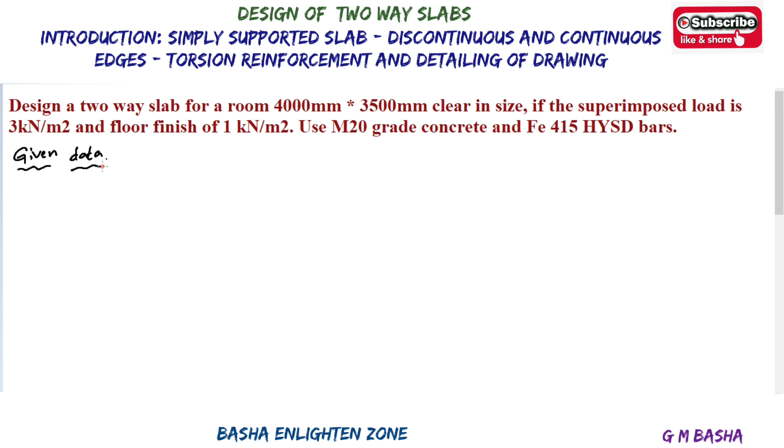First take down the given data. What is given in the question? Shorter span, Lx, will be equal to 3500, and Ly will be equal to 4000, in mm. Live load will be equal to 3 kN per meter square. Floor finish will be equal to 1 kN per meter square, FCK will be equal to 20 Newton per mm square, and Fy will be equal to 415 Newton per mm square.

In the one-way slab, by seeing the data itself, first you can confirm whether it comes under one-way slab or two-way slab, then go to the design. But in the two-way slab, there are various conditions we have to observe. First, each time we go with the ratio Ly by Lx. Whether it is less than or equal to 2 comes under two-way slab - that confirms it. If it is greater than 2, it comes under one-way slab.

So what is longer span direction, which is 4000 by 3500? If you see how much the ratio will be, it will be around 1.14, which is less than 2. Therefore the design comes under the two-way slab.

Sometimes in the question they will ask directly to design a slab. At that time you check the ratio first to see whether it comes under two-way or one-way slab. Here they gave shorter span direction as 3500 in x direction, and y direction as 4000. They didn't mention any conditions, because in this same problem I will explain different conditions - what are the different conditions in the two-way slab.

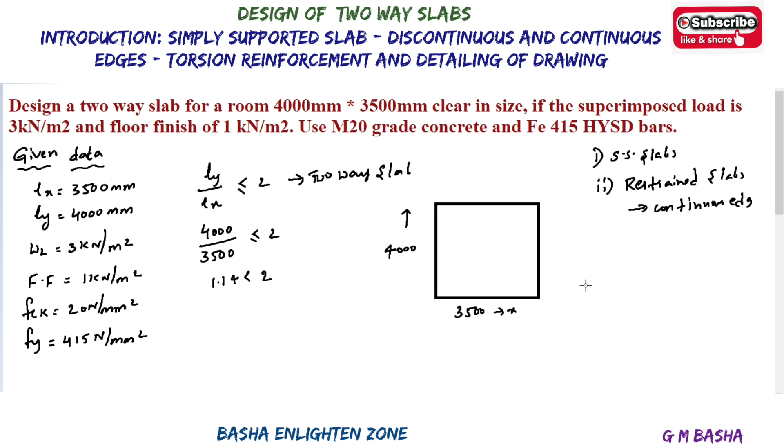For example, if you see this slab here, and again if I take one more slab here, we are going to design this particular slab with dimensions of some 4 by 3.5 meters. So here one edge will be continuous. Sometimes the condition will be different - two edges will be continuous, meaning these two adjacent edges will be continuous.

Sometimes opposite edges - this is the span what we are designing - the continuous edges will be on opposite sides, like this. Either in long span direction, long span edges continuous, or short span edges continuous. The span is continuous in different ways - that is another type of condition we have to take into account.

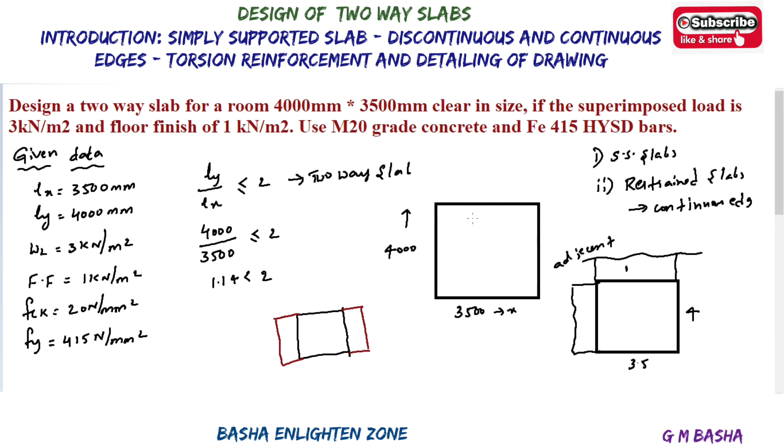First, we will go with this condition: the slab is discontinuous on all edges and it will be prevented from lifting. Another thing we have to clearly observe - this is the top view what we are seeing now. For example, if I take the same slab in 3D mode, this is the slab of some 3.5 meters by 4 meters.

The slab has rested on the columns like this. If you observe here, this is a simply supported slab and there will be no continuous edges, which is discontinuous on all sides.

At this time, you know the condition - this is one-way slab, meaning x direction is the shorter span direction and y is the longer span direction. In the one-way slab, it bends in the shorter span direction. Therefore we provide main reinforcement in shorter span direction and distribution reinforcement in longer span direction. This is the distribution reinforcement and this is the main reinforcement.

But coming to the two-way slab - it bends in both directions, either in y direction and in x direction. Therefore we have to provide main reinforcement in both the shorter span direction and longer span direction, since there is a chance of bending the span in both y direction and x direction. Therefore we provide reinforcement in both directions.

At the same time, if the slab is continuous like this - for example, see here, the slab is discontinuous on all edges.

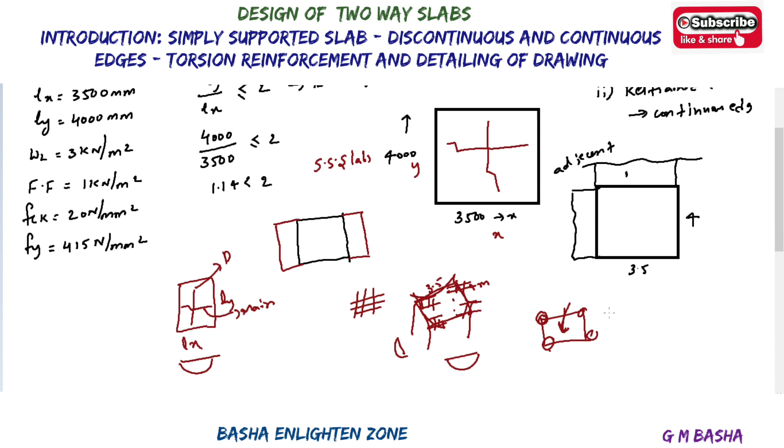And one more thing to observe: if the slab is continuous like this, the slab will be continuous on adjacent edges. So this is one edge, this is another edge. What happens here? This corner cannot lift up, because this slab is continuous. The reinforcement is also provided continuously from here to here in the slabs. Therefore, there is no chance of lifting up here.

Coming to this corner, this is a free corner with no continuous edges on both ends, so automatically this corner will lift up. That is the reason we have to provide torsion reinforcement at this corner. So for that, what is the percentage? We have to provide some 3/4 area of steel like that. I will explain in the calculation how you have to provide it.

Coming to these two edges, this edge and this edge: one edge will be continuous, another edge will be free. Therefore, we have to provide half of the reinforcement that we provide at the free corners, which is 1/2, meaning 3/8 area of steel. The same condition happens here, because up to some extent it will be prevented from the other edges, but the other edge is free. Therefore, we provide half of the reinforcement at these two corners. So we provide full reinforcement at the free corners, and here no reinforcement is required.

Now come to this condition: this slab will be continuous on opposite edges, both opposite edges. At these edges what happens? There will be half of the reinforcement at these corners, and at the same time, each corner has one discontinuous and one continuous edge - discontinuous, continuous, discontinuous, continuous. This means we have to provide just half of the reinforcement for all the corners of the slab, on all four sides.

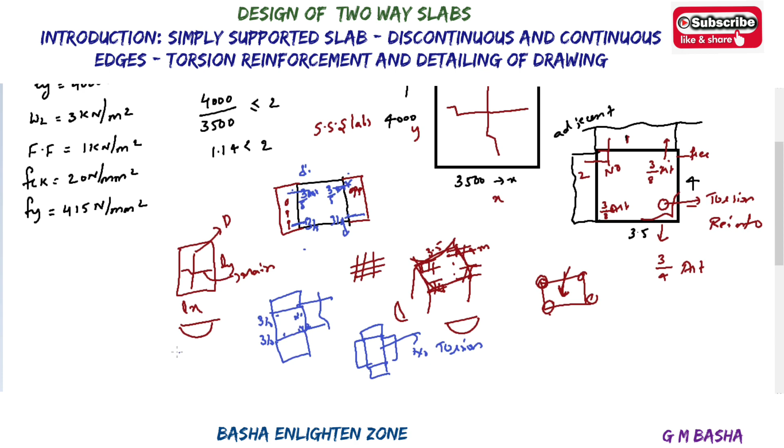So first, according to our question, there will be no such conditions - I am just solving the problem based on simply supported conditions. Again, I will show how to provide torsion reinforcement, and take the condition where the edges are continuous, to show in what way to solve the problem. In this one example itself, I will show the difference between the three examples.

Continuing this problem, our first step is always to check the L by D ratio, the span to depth ratio. This is based on the depth of the slab.

For that, you can refer to the code book, page number 39 in IS 456. Check that page number. There it states for slabs spanning in two directions, that is two-way slabs.

The shorter span of the two spans should be used for calculating the span to effective depth ratio. For two-way slabs of shorter span up to 3.5 meters, our LX will be 3.5 meters only, so we will suit this condition.

With mild steel reinforcement, the span to overall depth, meaning L by capital D, not small d, ratios given below may generally be assumed to satisfy vertical deflection limits for loading class up to 3 kN per meter square, so live load up to 3 kN per meter square.

For simply supported slabs, L by D ratio will be 35, and that is for mild steel, which we are using as Fe250. For HYSD bars, you take the factor multiplied by 0.8 for these values. For continuous slabs also it will be 0.8.

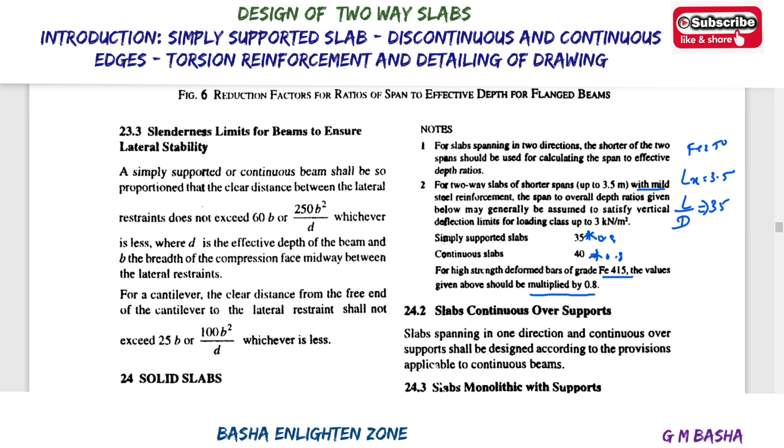So 35 into 0.8, how much will it be? If you cross check with your calculators, 35 into 0.8, how much you will get? You will get around 28, so L by D will be equal to 28.

So the depth ratio will be around L by D. This is how the L by D ratio we have to take in slabs. This is capital D here, I will take capital D only, and capital D will be around 28. So check with the depth, take down the L value in the shorter span direction.

This is 3500, so 3500 by 28, you will get around 125 in mm. So your overall depth will be 125 mm. I will take an approximation of capital D equal to some 150 mm.

So for this approximate value, small d I will choose effective cover around some 25 mm, so small d I will take 125 mm. Based on this condition, we get one conclusion: it should not be less than 125, so your capital D we cannot provide as 120 or less than that value.

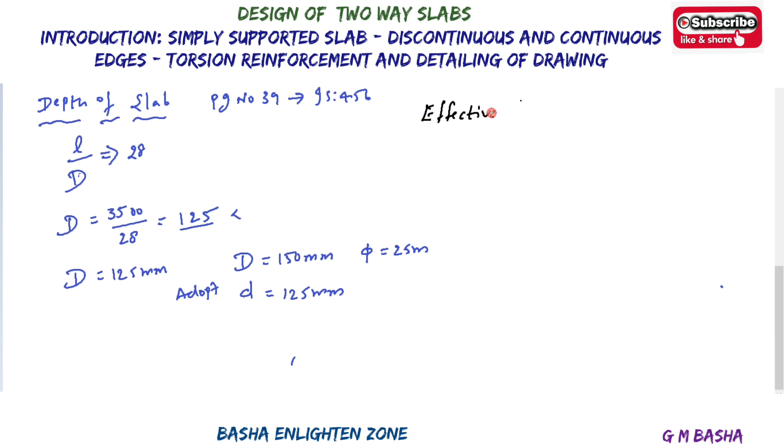Then our next step, after obtaining these values, is finding the effective span. So we know the condition for the effective span: clear span plus effective depth. I will take this in both x direction and y direction.

So LEX, which is in x direction: clear span will be 3500, effective depth will be 125, how much will you get? 3625 mm. And in y direction, 4000 plus 125, so approximately we will get 4125 mm.

So these are the ranges for the shorter span direction and longer span direction. Again check the ratio of LEY by LEX, so you will get 4.125 by 3.625, which is almost 1.14.

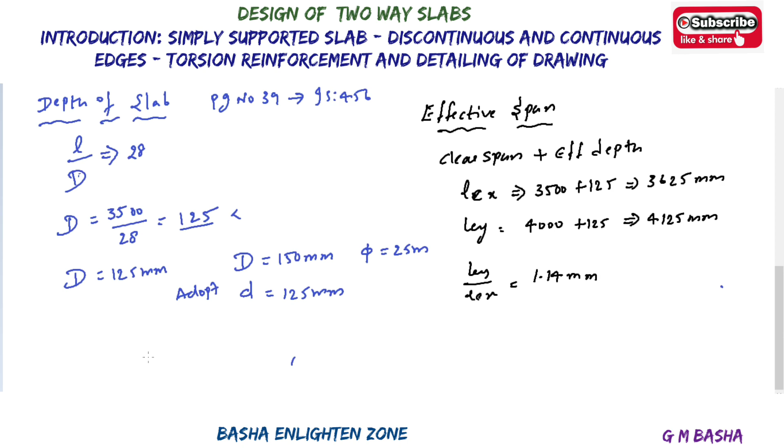Then you can go for the next step, which is slab loads. For slabs, we already know the slab portion, and the thickness we choose here: d will be equal to 125 mm, which is the depth of the slab we provided.

In the short span direction, lengthwise, lx will be around 3625 mm, and in the long span direction it will be around 4125 mm, both directions. So this is the slab and the depth of the slab.

So how will the loads be calculated? Self weight of slab will be equal to, generally for beams we take b into d into unit weight for unit meter. But for slabs, lengthwise it is 3.625, widthwise it is 4.125.

So what I am taking here: lengthwise I will take up to 1 meter, widthwise also I will take up to 1 meter, so totally it is in meter square. That is 1 into 1 into unit weight of RCC, which is 25 kilonewton per meter cube.

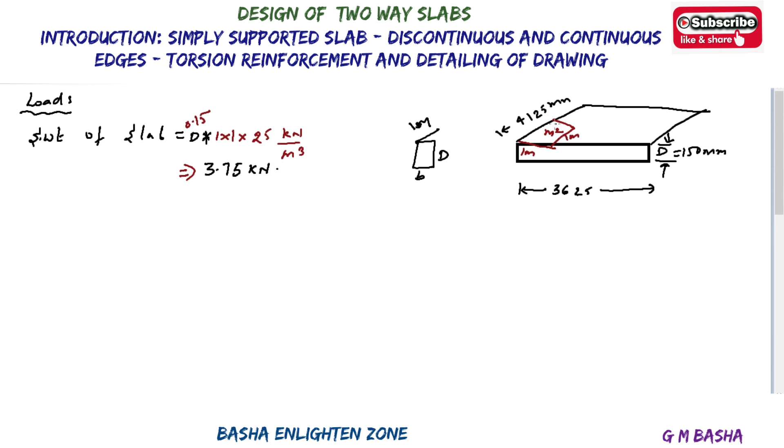And at the same time, each and every live load you observe in the question, they are given 3 kilonewton per meter square, like that. For beams it will be given 3 kilonewton per meter only, and again floor finish will be given 1 kilonewton per meter square, otherwise you can assume your own value. So then take down the total load, 3 plus 1 plus 3.75, which is 7.75 kilonewton per meter square.

Again take down the factor load, which is 1.5 times of 7.75, that one will be around 11.625 kilonewton per meter square. So this is the loads how we have to calculate it. So the total load will be around 11.625 kilonewton per meter square.

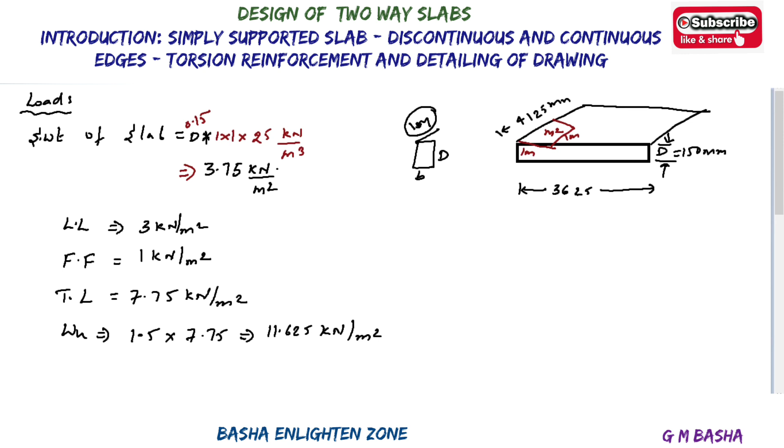Then after this we have to go for next step, finding moments based on the loads. So for one way slab, generally what we have to do, we are finding directly. Before going to the moments, check whether this depth will be suitable for this span or not. So depth will be find out based on the moments only. First check with the moments and then we will find for the depth.

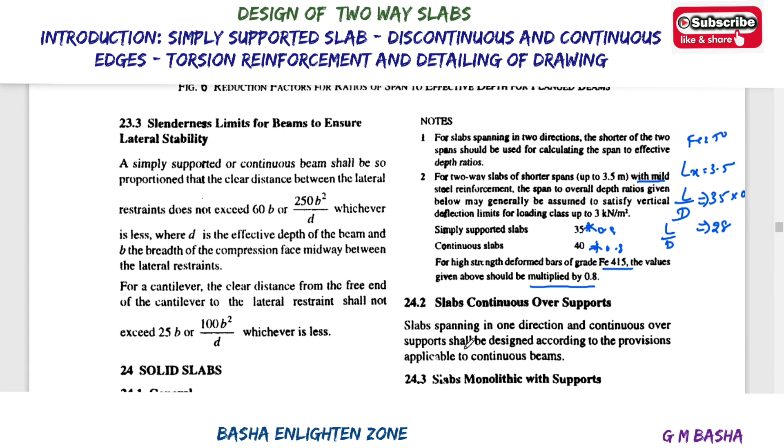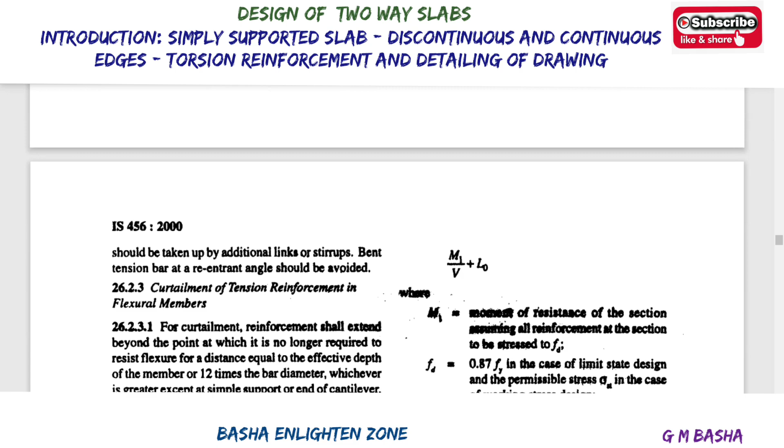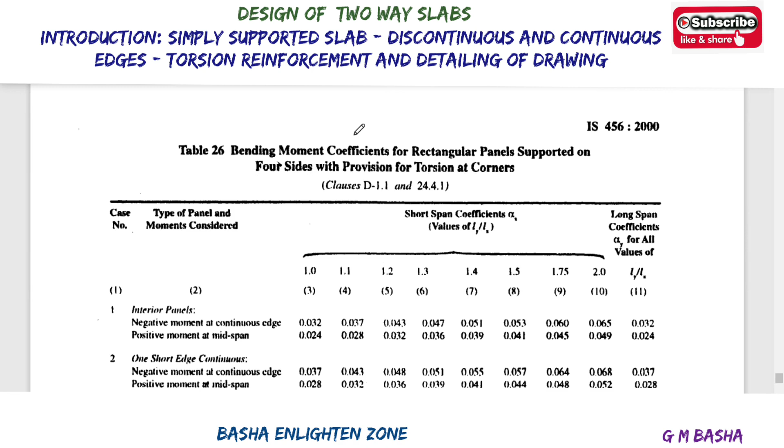in two directions at right angles, simply supported on four edges. So here our condition is simply supported on four edges, means there will be no continuous slabs. If the slab is continuous, we can go for another table which was table number 26. After completion of this problem, again I will come and I will discuss what are the conditions here.

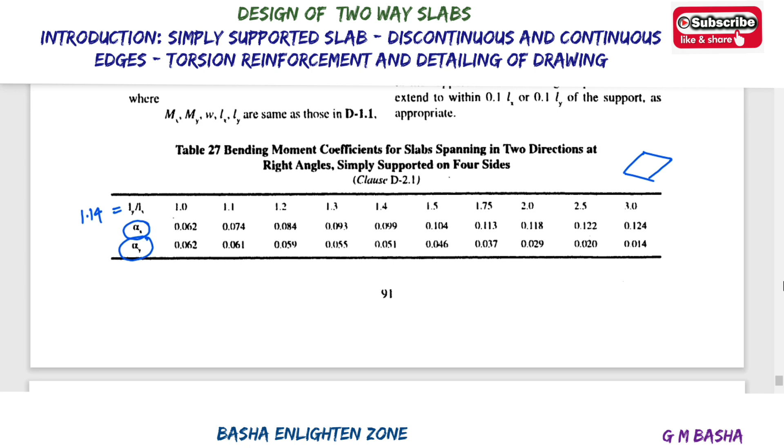First I will take the simply supported conditions. So here if the slab is simply supported on four sides, you can check with these conditions. Your Ly by Lx ratio will be 1.14. So here you will get the coefficients alpha x and alpha y. After that we have to substitute the same values with mx will be equal to this alpha x value what we chosen here, and w we use the ultimate load what we calculated here, that is 11.625 kilonewton per square meter, and lx is the short span direction. For both my also you will get, for mx also you will get lx.

So this was in IS 456. You can take down the formulas as it is, and here you have to choose alpha x and alpha y. So generally the value is 1.14. So there will be values for 1.1 and 1.2. So we want exact values of 1.14. So if you want exact values of 1.14, what we have to do? We have to go for

interpolation on both these values, then you will get this alpha x and alpha y directly. So already I solved so many times how to make the interpolation for the two values. For example, if you will get any midterm value, how to make the interpolation by using some scale. For example, 1.1 it will be around 0.074, and for 1.2 it will be around 0.084. So what is the intermediate value for 1.14? Like that I showed each and every time in the beams and slabs.

You please check once the procedure how I did. In the same way you can simplify these two also. For 1.14 how it will be. So I will take the values directly. So your alpha x value will be equal to 0.078 and alpha y value will be equal to 0.06. After that, take down in the formula, mx will be equal to moment in x direction, that is alpha

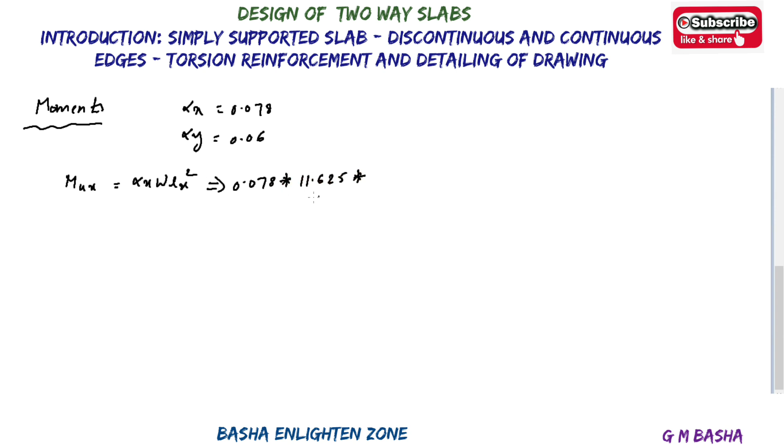w lx square, which was in the code book. Now I showed here 0.078 into w will be equal to how much it will be 11.625 into lx square will be so 3.625 whole square. So directly we will get the value of moment will be 11.92 kilonewton meter.

Similarly in the y direction, moment in y will be equal to alpha y w lx square. So it will be around simplified, take down all the values. Alpha y will be 0.06, w will be equal to 11.625 into lx will be 3.625 whole square. It will be around 9.17 kilonewton meter.

So here both moment in x direction and moment in y direction values will be obtained. Then I will check the depth - whether the depth I have taken is correct or not, whether it's suited to the particular problem, and whether it will resist the bending moment or not. I will check this once.

That is, Mu will be equal to 0.138 fck b into d square. Here I am going to check d. Since Mu again there will be two Mu values, I will go with the higher moment. Why? Because whatever depth we choose to resist the higher moment will automatically resist the lower moment. If it is not suited to the higher moment, we can change the depth.

Then Mu will be equal to 11.92 into 10 to the power of 6, that is 0.138 into fck, which will be 20, b will be 1000 (for 1 unit meter), into d square. So check d, how much you will get - it will be around 66 mm, which is less than what we adapted.

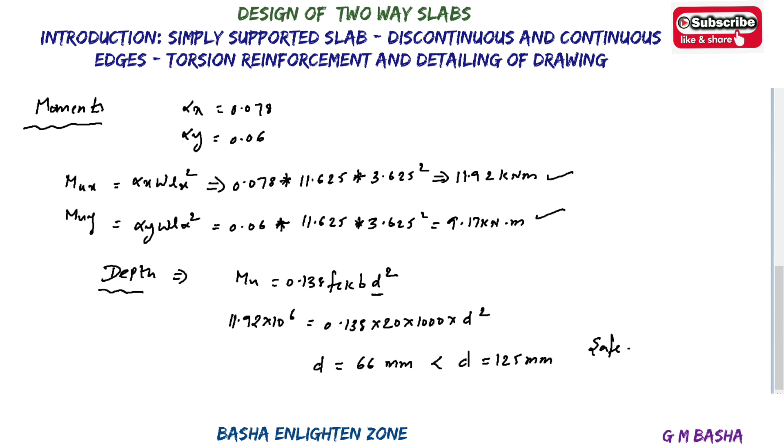So check the effective depth once after obtaining the moments, and then provide the reinforcement. For providing reinforcement, there will be two moment values, one in x direction and one in y direction. So first I will go with the moment in x direction value.

Again I will take the same formula which was on page number 96 in the IS code book. I already showed that formula various times while solving the previous problem - you go there and check that problem, that formula. I will show here also once.

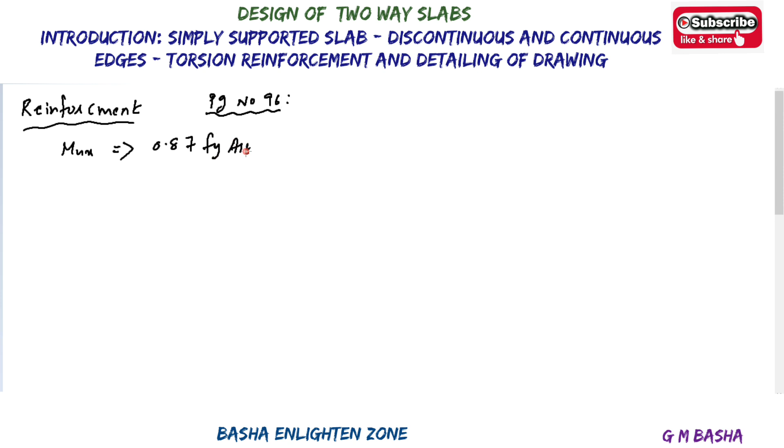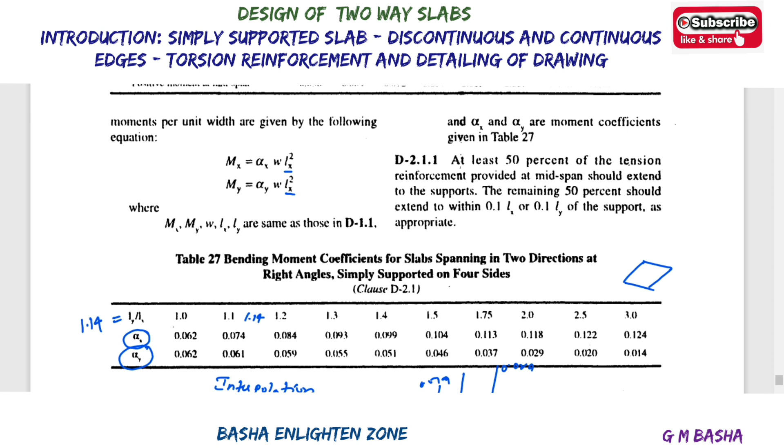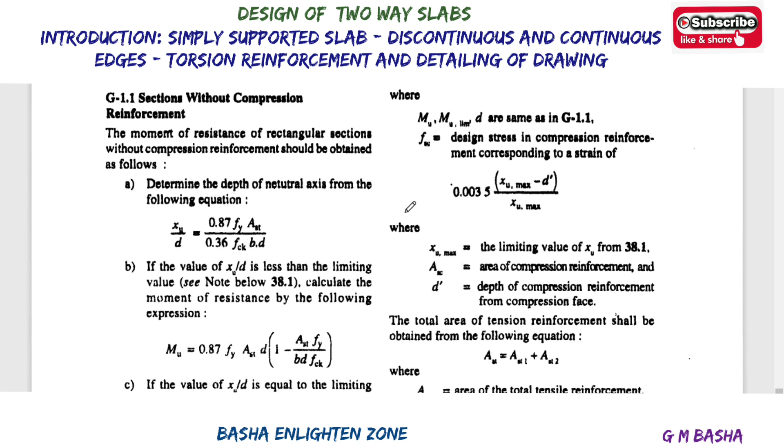That is, 1 minus fy Ast by fck into B into D. See in the code book where it will be - in the annexure, here clause G-1.1, this formula I took directly from there. So always remember this formula directly.

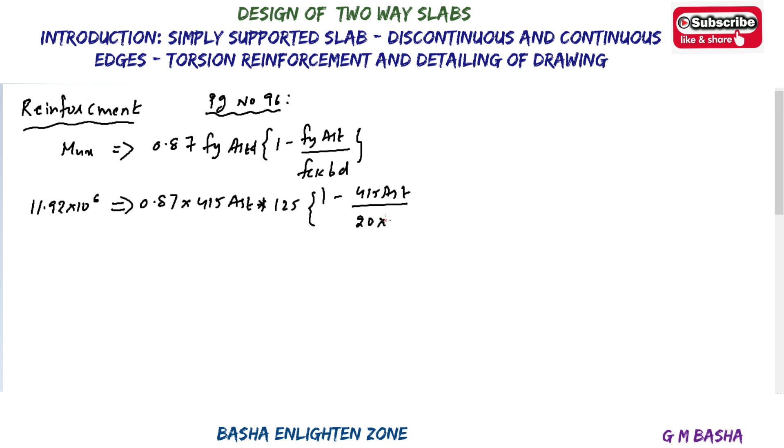Then after taking this formula, simplify the values to see what will be given. So we already have MUX value, which is 11.92 into 10 to the power of 6, and 0.87 into 415 into area of the steel, and the D value we chosen. Again 1 minus Fy will be 415 AST by FCK will be 20, into B value will be 1 unit, and again D value will be 125.

So if you simplify this using your scientific calculator, your area of the steel will be around 277 mm square - I think 276.8 mm square.

Okay, then provide spacing directly here itself. The formula will be AST will be AST by AST into 1000. Generally after obtaining the area of the steel in beams, we provide n number of bars using capital AST by small AST. Based on that we can provide n number of bars by taking a diameter as trial. But here in slabs you can provide whatever value you get directly, and for that you can provide the bars.

So we know that the condition in Fe 415 is that the minimum diameter bar used for slabs will be 8 mm. So I will go with that bar only. Pi 8 square by 4 into the area of the steel obtained here is...

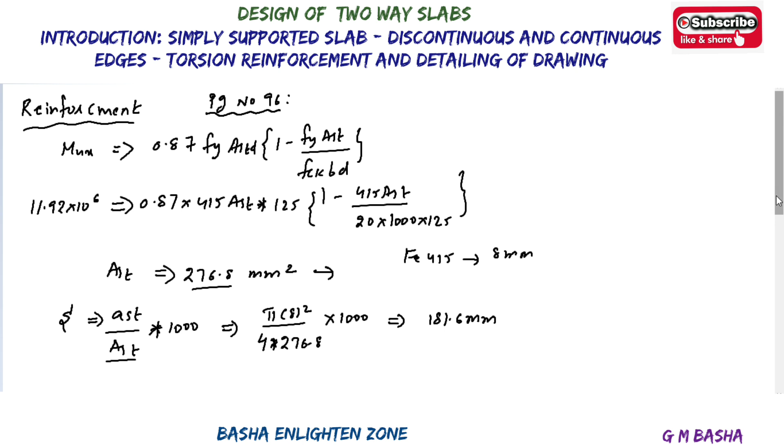276.8 into 1000. I will check the spacing, how much it will be - it will be around 181.6 mm. Then again we can check this spacing with two other conditions, that is how much the maximum spacing allowed is - one will be 3D, another will be 300.

Effective depth will be 125, which gives 375 in mm. So out of these three, you can choose the lesser value and provide that. So therefore provide 8 mm dia bars at an approximate spacing of 180 mm center to center.

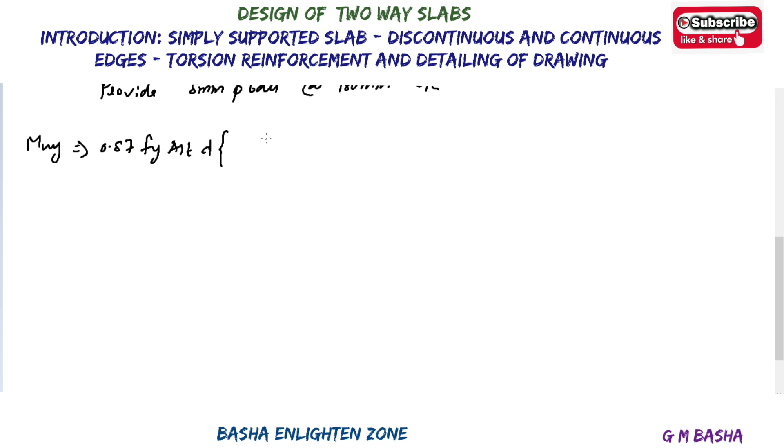Therefore area of the steel provided will be the value we obtained directly here. And then next, go with the moment in y direction. Again take down the same formula which was in the code book page number 96, the same formula we used for moment in x direction.

So this is the formula we used. Moment in y direction will be around 9.17 into 10 to the power of 6, 0.87, 415, area of the steel, D value will be 125. Sorry, here there will be one change while taking D value, so I will explain that. The D value will be taken lesser than the D we obtained in the previous one.

I will show that. Here in the slabs you can observe one thing. This is the depth of the slab, and we provide the reinforcement like this in the y direction. In the slabs generally we are providing reinforcement 8 dia bar in x direction. So x direction will not be like this, that is y direction. So this is x direction. I will choose 8 dia bars directly here. This is the bar which consists of 8 dia, like that you can assume.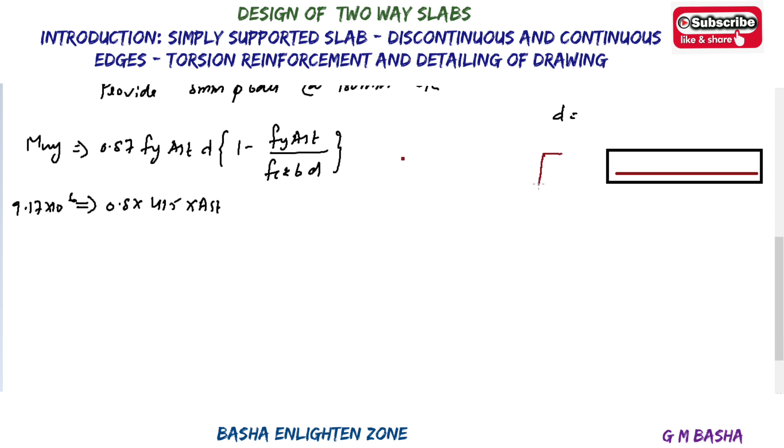If I cut this section, you will get only the bar of 8 dia. In the y direction again we have to provide bars. For example in the slab, this is a slab, we are providing reinforcement. This is the reinforcement I provided here, and in the y direction also we have to provide reinforcement. So this is below, and the y direction reinforcement is the upper top one. So like that you have to assume. If I see from this view, I will get one bar like this, another bar will be on top like this. Here also the same situation happens. In the y direction bars come like this.

So what is effective depth? Effective depth is taken from center of the bar to the top while calculating moment in x direction. But while calculating moment in y direction, again the effective depth will be taken from the center of the bar to the top. For obtaining the center, you assume the diameter of the bar in y direction also 8 mm, since we already chosen 8 mm in the x direction. From here to here again the center of the bar is what we chose. We are taking the length from the center of the bar up to the other bar's center, so I will omit that 8 mm. This is 4 and this is 4, totally 8. So 125 minus 8 will be 117 mm.

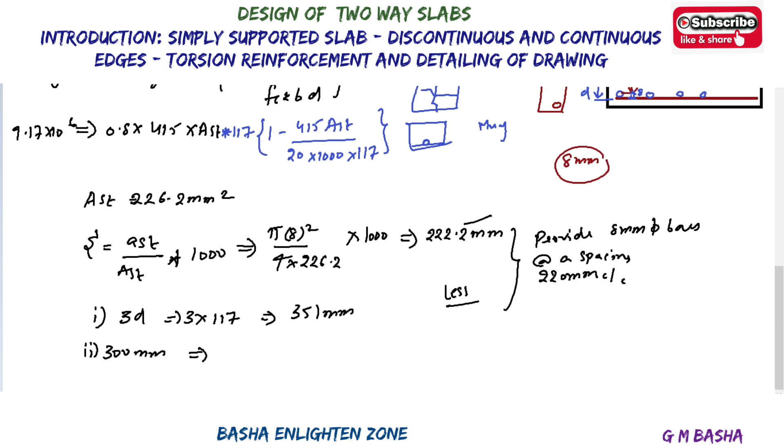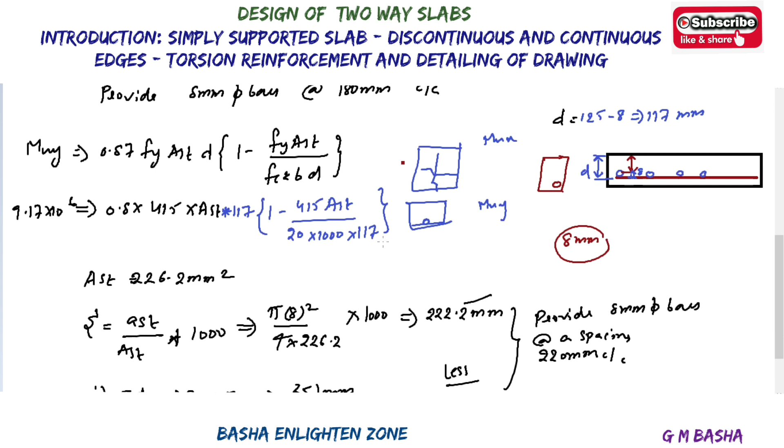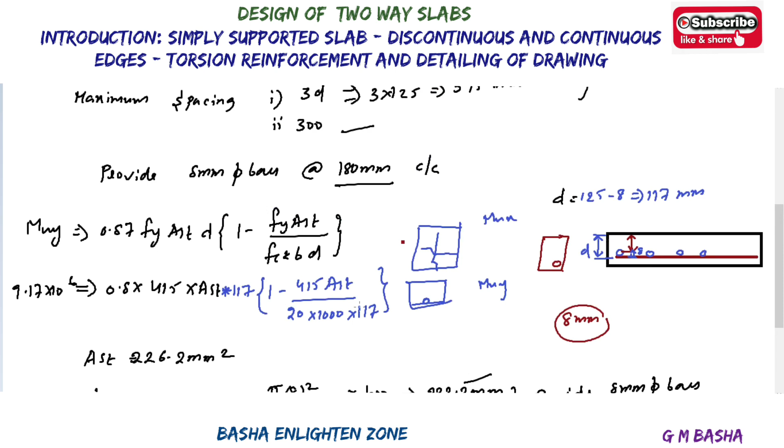I also want to tell one more point here. The moment in x direction and moment in y direction are also very near values. Here we are providing in x direction 8 mm bars, and here also we are providing 8 mm bars. But after calculation of all these things, what is the difference observed here? Here 180 mm spacing and here 220 mm spacing. So without calculation also you can choose the same spacing for the moment in y direction, it will be eligible, but we cannot choose this lower spacing for this problem, because here the moment is higher.

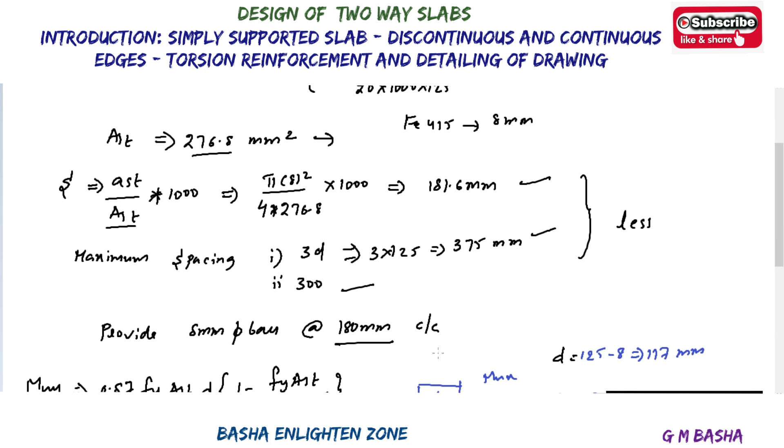So for making the calculation simpler in the examination, you prefer whichever is higher, either moment in x direction or y direction. You calculate moment for that one, and then you can provide the spacing of the higher moment to the lower one also.

Then your calculations will be simpler and accurate. Okay, let's go to the next step, which is reinforcement in edge strip. I will also explain what is edge strip and what is middle strip.

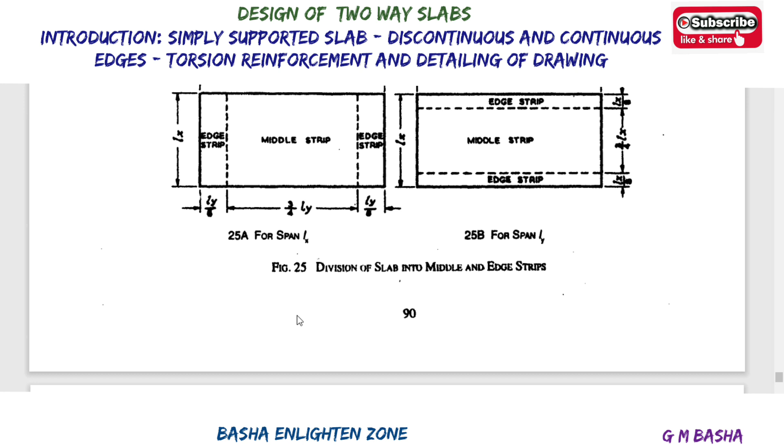See in the code book, here is how the diagram will be. We can divide the slab for two-way slab like this. In the x direction, we are dividing Lx by 8 times, that is the edge strips, and we can keep the remaining part as is. Again in the y direction, the edge strip will be Ly by 8 times. So on a particular portion of the slab, we can divide like this. The edge positions will be around Lx by 8 and Ly by 8 on all sides. This is how the diagram will be.

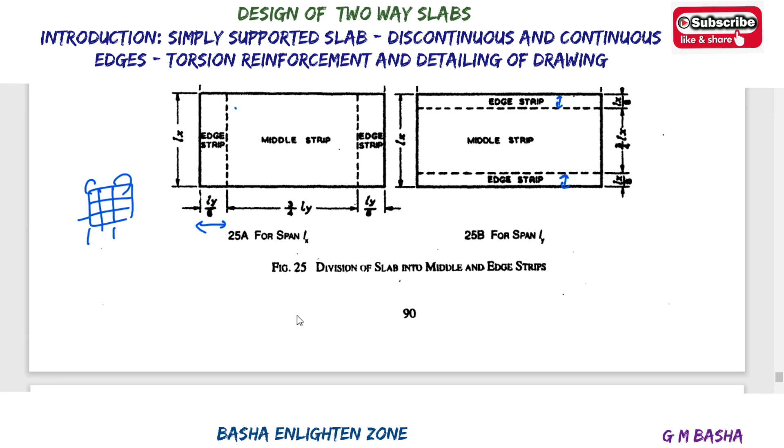So the middle strip means we have to provide full reinforcement. Whatever reinforcement we are taking here, it is 8 mm dia bars at spacing of 180 mm in the x direction. In the y direction it will be spacing of 220 mm... actually in the y direction we are providing 8 mm dia bars at spacing of 180 mm center to center. Why? Because the maximum bending moment happens at the mid span only.

But at the edge strip, it will be resting on the supports also, so maximum bending moment doesn't happen at the edge strips. Therefore we have to provide minimum area of steel there. That is the edge strip calculation - we just provide the minimum area of steel. So what is the formula for that?

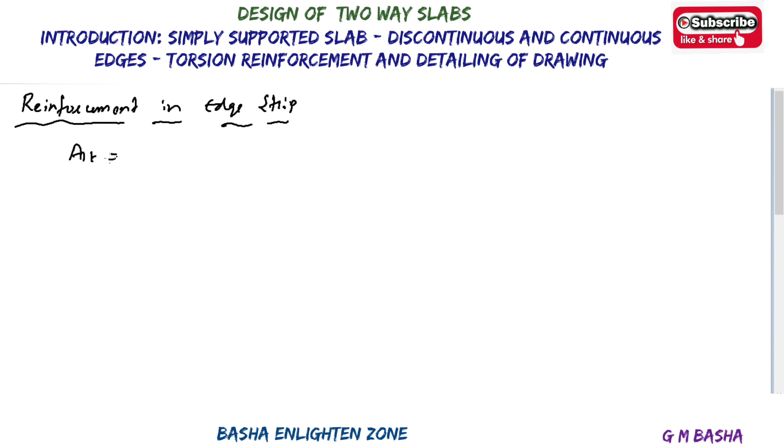The area of steel will be equal to 0.12% of gross cross sectional area. That is 0.12 by 100 into B, which is 1000, into D, where D value is 150 mm. If you simplify, you will get the value of 180 mm square.

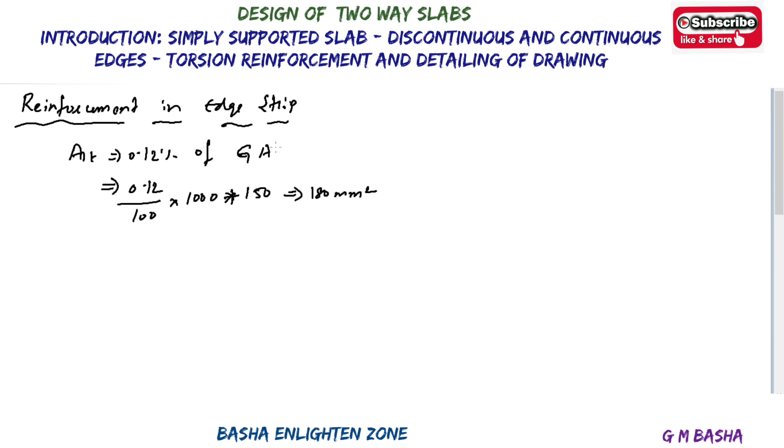So this is the minimum area of steel we have to provide in the edge strip. I am telling you this is the minimum area of steel required for this particular entire two-way slab also - you can check once. So this is the minimum area of steel for the edge strip, and this is the minimum area of steel for the entire slab.

So in the x direction, the area of steel for the moment will be around 276. In the y direction, the area of steel will be 222. If you check these two, the moment will be higher than what we provided in the middle strip. So therefore our design will be safe.

Otherwise, if the moment in x and y direction were some 150 and 160, at that time we would have to provide minimum reinforcement in the entire slab also. We can't go with the minimum reinforcement if it gets lesser than this 180. So if your area of steel is higher than 180, you can provide that one also, as we did in this problem. Later you can check that condition too.

So the minimum area meets the requirement of minimum reinforcement coming in this slab, that is 180 mm square. We provided around 276 and 222, which is higher than 180, therefore it is safe. And the reinforcement in the edge strip is 180 mm square.

For that you have to provide spacing, and the spacing formula will be AST by capital AST into 100. We know the minimum dia bar we use for beams and slabs will be 8 only. pi into 8 square by 4, into area of steel which is around 180 mm square obtained here, into 1000. If you check this condition, you will get around 279.3 mm.

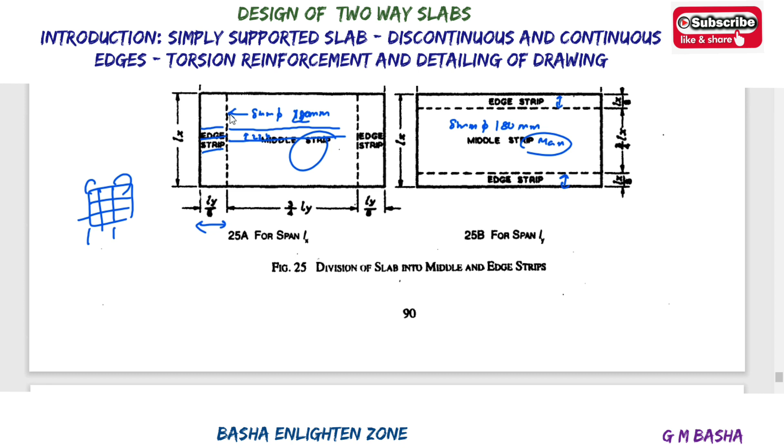This is how the reinforcement in the edge strip is done. After that, you can go for the deflection check.

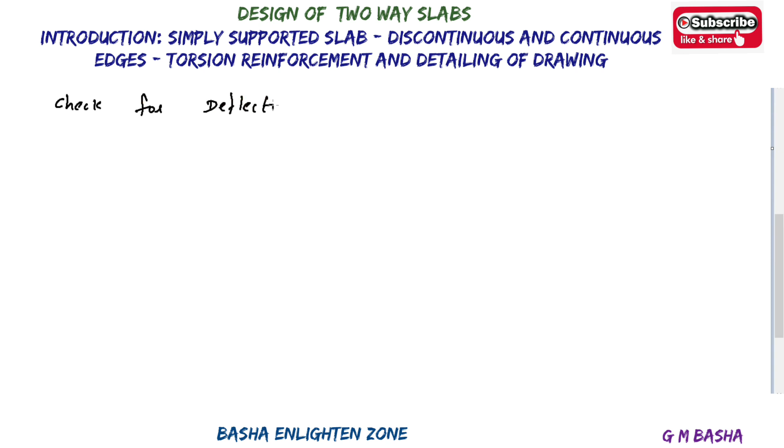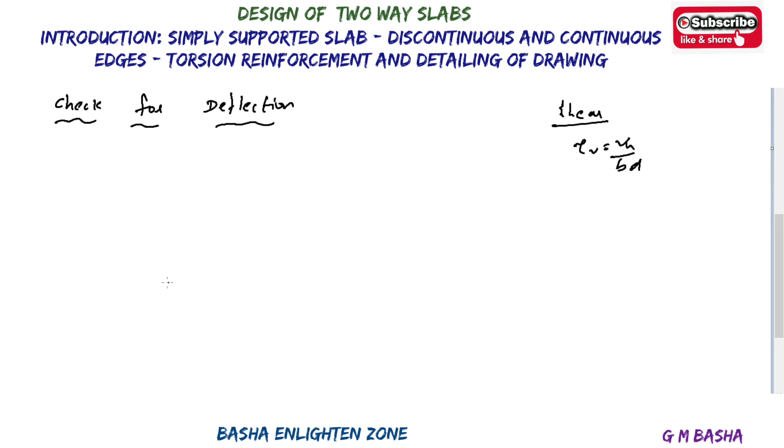We know the deflection, and one more check we do in slabs and beams is shear. Tau v will be equal to Vu by bd, but we are not calculating shear here because slabs are almost safe in shear, so there is no need to check it again once the shear reinforcement is almost safe. So then go for the deflection check.

L by d provided will be less than L by d maximum. Again, L by d maximum equals L by d basic into the modification factor for tension reinforcement only - you won't get compression and flange factors like in beams. L by d basic will be 20 for simply supported slabs. For providing the tension reinforcement, we can check the code book, around page 39 I think.

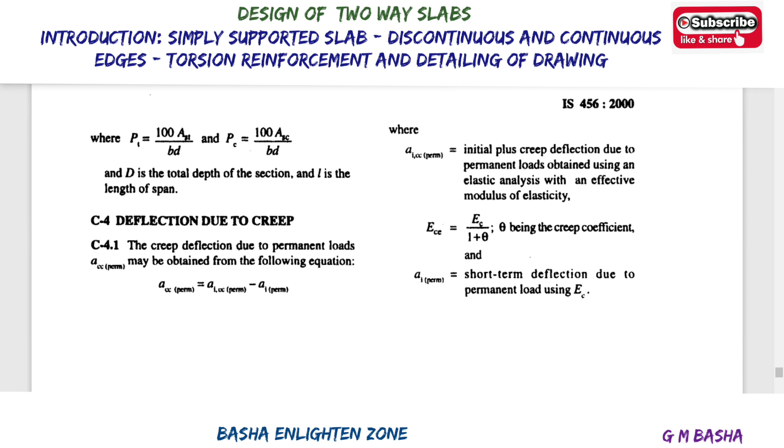So we know how much we are providing, 100 AST. Pi diameter will be 8 square by 4 into 1000 into 125. If you simplify, you will get around 0.223%.

So 0.223 means somewhere here, you can check in the same line, maybe it will meet exactly here, which gives a 1.6 factor. I've already shown so many times how to take this reinforcement problem, please check there. So 1.6, and at the same time the modification factor here for slabs will be...

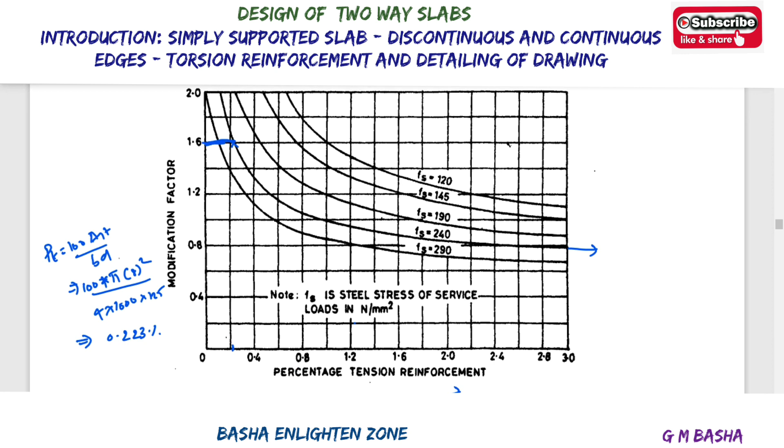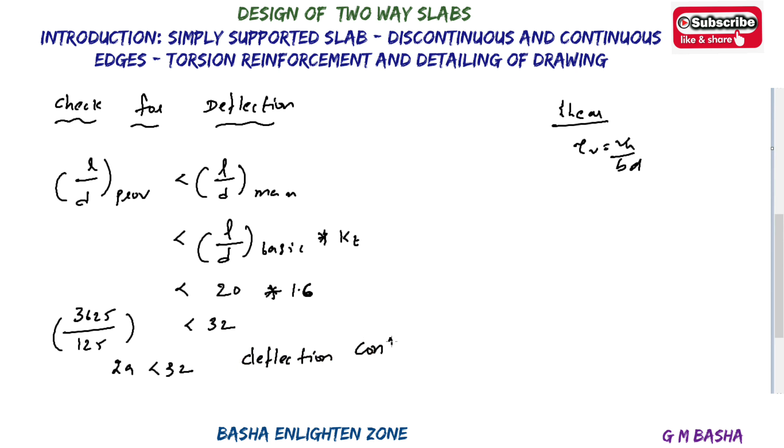Simplify this: 20 into 1.6 will be around 32. And again, L by D provided, how much will it be? L value will be around 3625 in the shorter span direction, and D value will be 125. If you simplify, you will get 29, which is less than 32. Therefore your deflection is also controlled, so it is safe. Deflection control is safe. So I already told you, this is how to solve the problem for the simply supported slab.

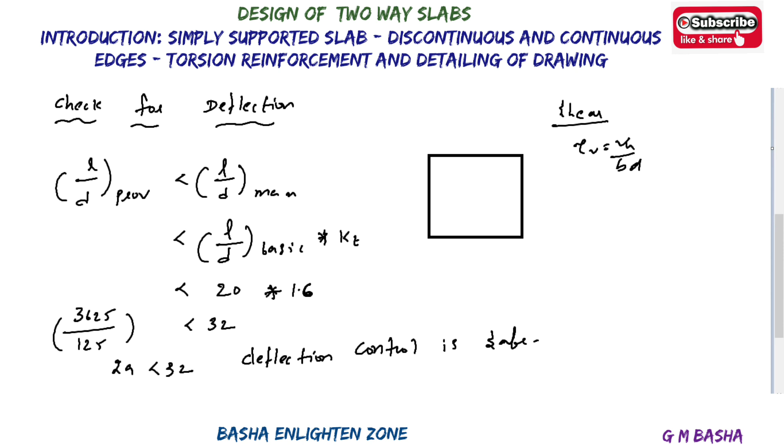Again, if they ask a question like this - if the corners are prevented from lifting - at that time we can go with another calculation. The questions will come like this: corners are prevented from lifting, or discontinuous edges, meaning the edges are not continuous. However the questions may be, generally they give it in various steps.

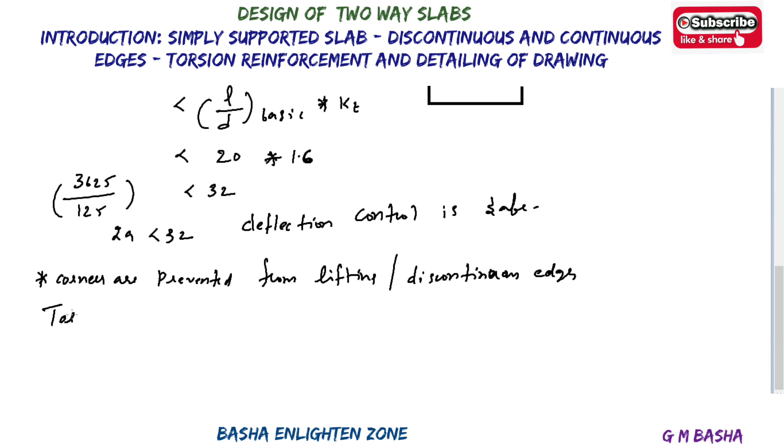At that time, what we have to do is provide torsion reinforcement. I have to provide torsion reinforcement. So now we are checking that calculation, torsion reinforcement for the same problem. So for providing the torsion reinforcement, we have to do the further calculations.

For torsion reinforcement, the area of steel will be 3 by 4 times the area of steel in the x direction. So 3 by 4 of the area of steel in x direction - check the moment area in x direction, we calculated that as 276.8 mm - it will be around 207.6 mm square. After obtaining the span, the next step is to check the spacing.

That is small AST by capital AST into 1000. So small AST will be around pi - for torsion reinforcement, if you want, you can take 8 dia. I will choose here 6 bar, which is a plain steel bar. Then 4 into 207.6 mm square into 1000.

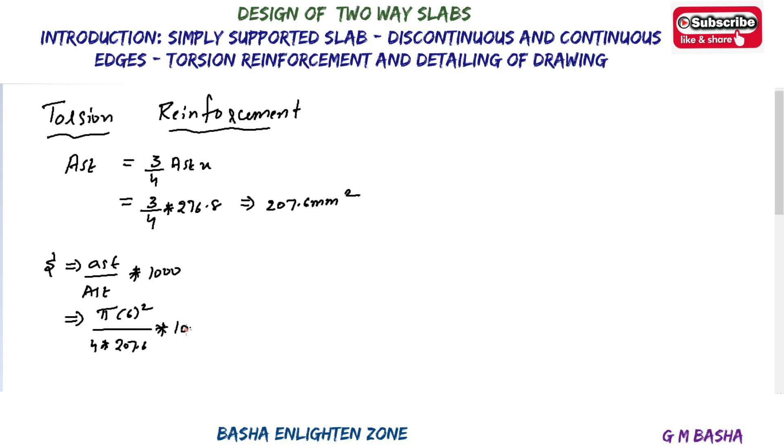So if you simplify, you will get around 136.127 mm. And again, for the torsion reinforcement, the distance is also required on the slab.

So at what distance do we have to provide it? The distance will be 1 by 5 of Lx, which is 1 by 5 of the short span. Lx means short span direction, 3625 by 5, which is 725 mm. So these are the requirements for providing torsion reinforcement for simply supported slabs.

So I will explain that. We have to provide bars. Generally this is a slab, both in x and y direction. So we are providing bars of both. From the top view, I am showing reinforcement in x direction and reinforcement in y direction in both spans, and again in the corners.

So this is the mesh. I am providing 6 dia bars. So torsion reinforcement I am providing like this. Check with the condition, provide 6 mm dia bars at 130 mm.

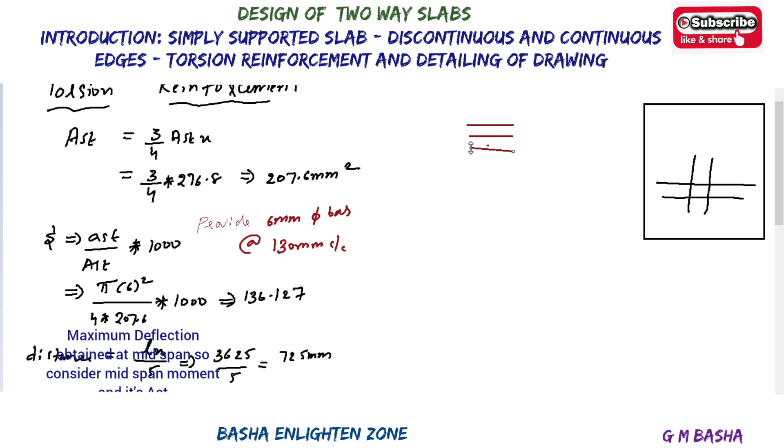I am taking this as approximation, center to center. So up to what distance? 725 mm. So here I am providing the mesh like this. This is torsion reinforcement in x direction, y direction. So each spacing will be 130. So how much distance do we have to provide? This is in x direction, and we also have to provide the same torsion reinforcement in y direction.

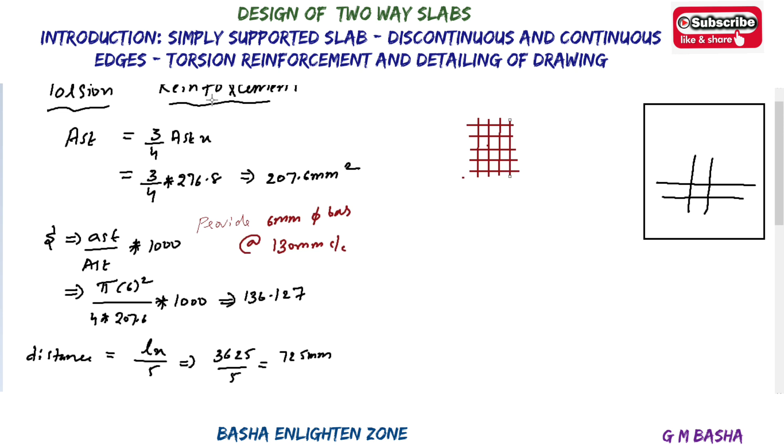Okay, see here, each and every spacing distance will be 130 mm and the diameter of the bar will be 6 mm. So the total distance is 725 mm. Like that, both in x and y direction, you can take the short span length of overall 725 mm distance. In that, you have to choose 6 mm dia bars at 130 mm spacing. So this is the torsion reinforcement.

The same thing you have to provide at the corners like this, and that too in 4 layers. 4 layers means, so this torsion reinforcement will be provided in 4 layers. Meaning first you place this torsion reinforcement, then provide the bars, then one more layer you provide this torsion reinforcement top side, bottom one, top one, like that. It will be totally 4 layers.

This is 2 layers: first layer of one direction, second layer of another direction. This totally consists of one unit, and again the same unit you can provide on the bottom side. So totally 1, 2, 3, 4 layers like that. This is 2 layers, and again 2 more layers will be provided on top of the bars. So finally, from the top view, you have to provide torsion reinforcement like that. Again, as in the basics, I will explain all the things.

For example, if you see here, this is simply supported with edges discontinuous on all sides. We have to provide torsion reinforcement on all corners. For example, one edge will be continuous like this. It will be continuous. At that time, you have to provide this full torsion reinforcement at these ends in 4 layers.

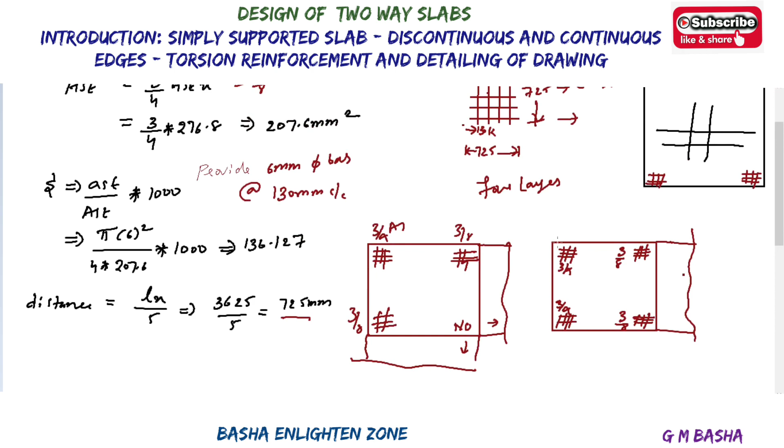Coming to the condition, the calculations will be different for the continuous edges, but same for the simply supported conditions. Whatever problem we solve now will be purely related to simply supported slabs, where corners are free to lift or prevented from lifting. But whenever continuous edges are given like this, the procedure will be somewhat different while calculating the moments. So I will discuss based on that point only.

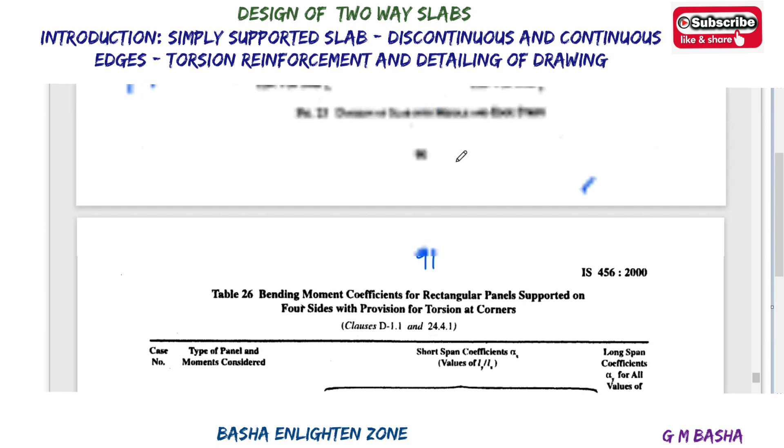So here it will be totally different—actually, the calculations will be somewhat different, not totally. So I will cut this one and paste in the next one, and discuss only about the continuous edges. See in the code book, page number 91, table number 26.

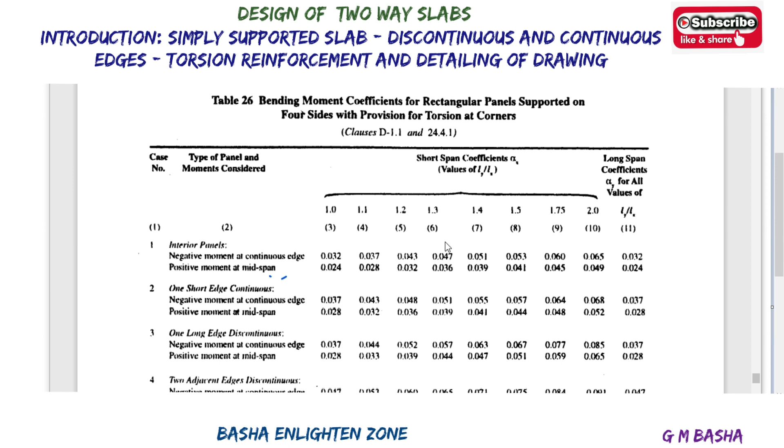Here it is clearly mentioned: bending moment coefficients for rectangular panels supported on 4 sides with provision for torsion at corners. If you read the conditions, you will get an idea. So one short edge continuous, interior panels, one long edge discontinuous.

One short edge continuous means this is a slab. Generally this is some 3 meters and this is 4 meters. One short edge continuous means this short edge will be continuous here with another slab. So at that time, the conditions will be taken based on this. Your Ly by Lx ratio maybe you will get 1.14. Already we solved only the simply supported beam like this.

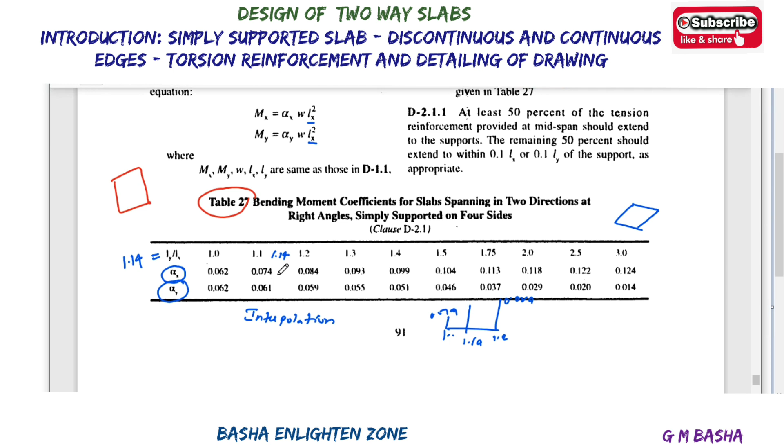So if it will be simply supported, what you have to do is solve the problem based on table number 27, without continuous edges. But the problem will be like this if one edge will be continuous, and again one long edge discontinuous.

So what is the condition here? One long edge discontinuous means only one long edge will have no continuation slab. The other 3 edges—2 short edges and one long edge—will be continuous. This long edge only free, which is y direction 4 meters, short span direction 3 meters. The same condition can also be given as: 3 edges continuous, one long edge discontinuous. Like that also they will give the conditions.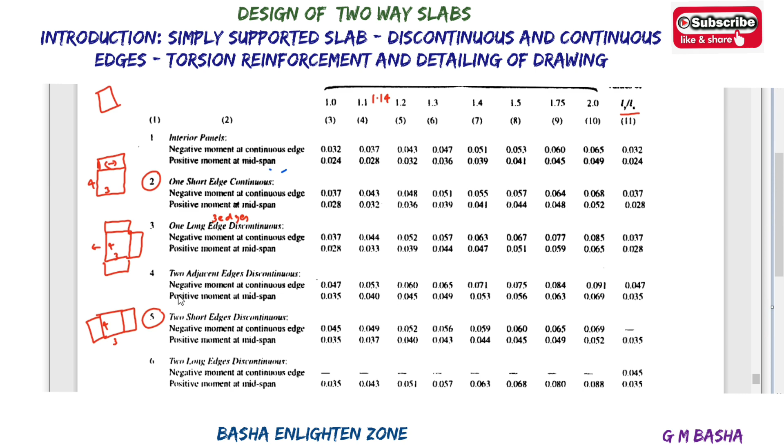These are the Ly by Lx ratio values for finding alpha x, and these are the alpha y values for finding Ly by Lx ratio. For example, it will be 4 by 3 meters. How much will you get? Check once in the calculator: 4 divided by 3 equals around 1.33. So it will be 1.33 here. Where does 1.33 lie? Between 1.3 and 1.4.

So for M20 grade concrete—generally the concrete grade is not mentioned—just Ly by Lx ratio will be 1.33. So for finding alpha x, I will check with some discontinuous edges: two adjacent edges discontinuous, so the value lies between 0.065 to 0.071. Maybe I will assume alpha x will be equal to some 0.67, because my value is between 1.3 and 1.4.

And again, that's the negative moment at continuous edges, meaning moment x negative. Here the formula is alpha x WLX square, so you have to substitute the alpha x value as 0.67. And again, positive moment at midspan.

So here also alpha x value lies between these two, which is 0.50, and again moment x positive. So this is also x, this is also x—this is negative, this is positive. The alpha x value will be taken as this one, WLX square.

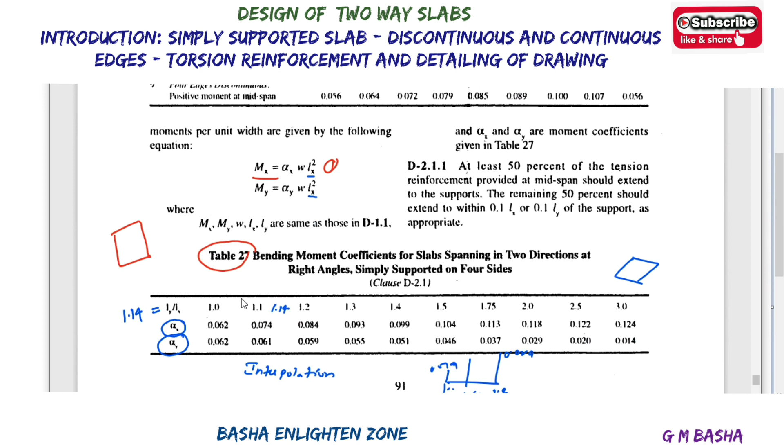Here also, for example, maybe you will get this one as some 10, this one as some 12, this one as 11.5. So you have to find the area of the steel for each and every moment. For the higher moment you have to find the depth required, because it will resist the higher moment and automatically it will resist for all the other moments also. So for each and every moment you have to find the area of the steel and individually provide the bars.

Otherwise you can do one thing: in the moment in x direction, see which moment is higher, find out the area of the steel for that particular moment, and provide that reinforcement to the other also. In the y direction also you can do like that only. So this is how the procedure will be different for the simply supported slabs and these slabs.

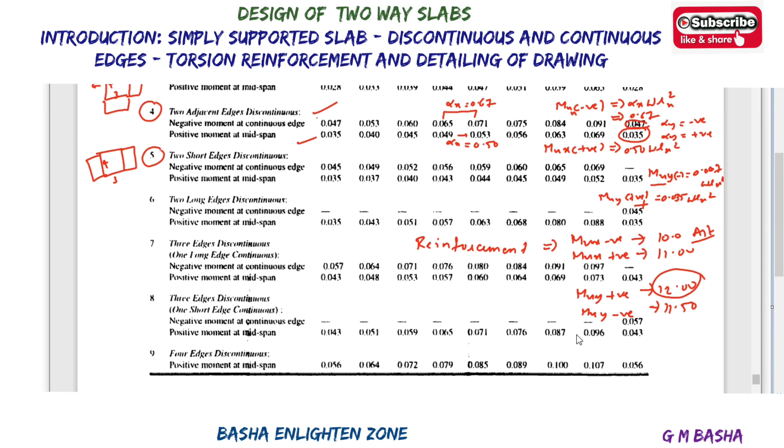So if simply supported slabs are given, you can solve the problem based on this table, table number 27, which I already solved. Now whenever continuous edges are given, you can see the conditions it suited, and you can take down the values based on these conditions, find out moments based on these conditions, and then the area of the steel.

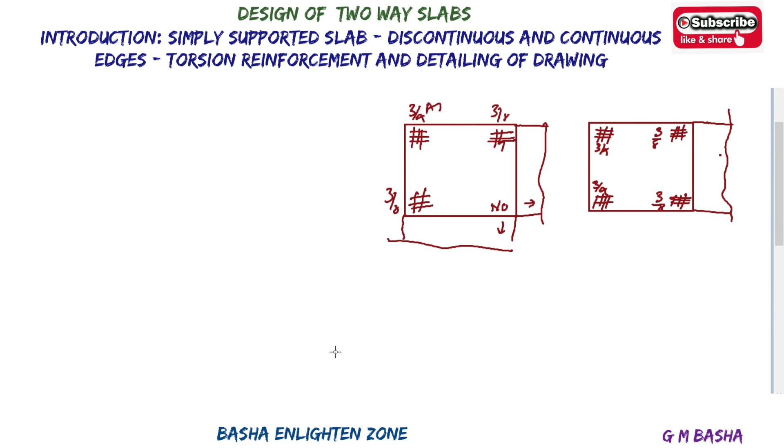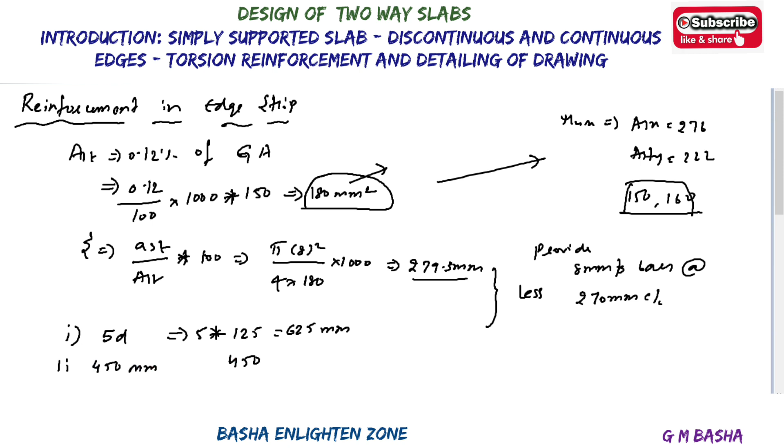After finding the area of the steel, the entire procedure remains the same, but finally, in the simply supported edges we provided area of the steel only for all the corners. So I will check the condition where it will be.

See here, torsion reinforcement will be provided for all the corners because it is a simply supported slab which is resisting on all the corners, meaning there are chances of the entire edge lifting at the corners. Whenever continuous edges are given, check the condition, find out the moments based on that particular condition as shown in table number 26, and then provide torsion reinforcement wherever it is required.

In this case, here you will get full torsion reinforcement, and here you will get half of the torsion reinforcement on both sides. Like this, the procedure will be different: how to provide the torsion reinforcement if the edges are continuous and if the edges are discontinuous. So this is the procedure.

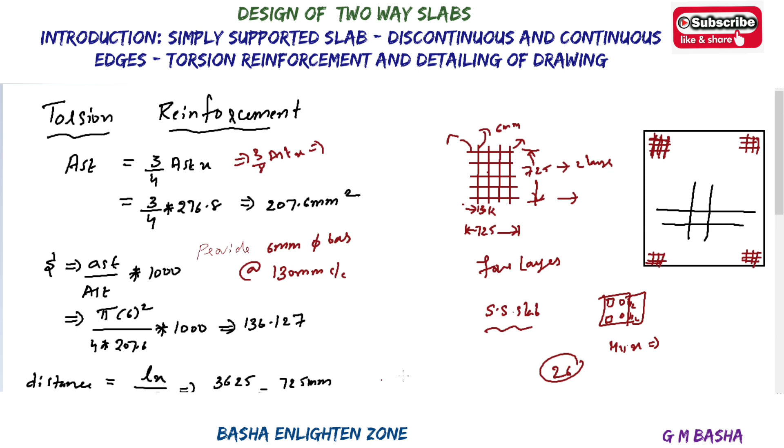And coming to the reinforcement details, this is the simply supported slab what we solved now. The overall length of the slab in the shorter span direction will be 3650, and in the longer span direction it will be around 4000, from here to here.

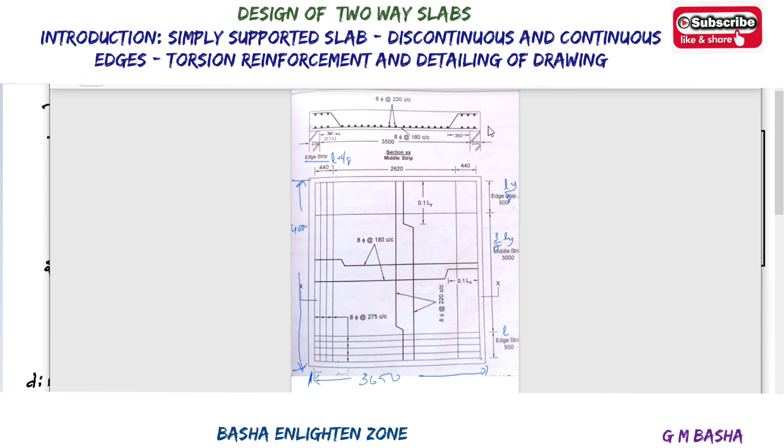So already I showed you in the code book how it will be divided into edge strips. The shorter span direction is Lx by 8, the longer span direction is Ly by 8, the middle strip is 3 by 4 times of Ly, and again here Ly by 8. Like that you have to divide the panel.

And again, we know one condition: we are providing the bars like this, one bar will be cranked here, and the crank distance will be 0.1 L. So here it will be 0.1 L, we have to take the crank distance. So one bar will be cranked on one side, another bar will be cranked on the other side. Like that we have to provide bars in the x direction. So already we choose 8 mm bars at 180 mm center to center in the x direction.

In the same way, they are providing one more bar in the longer span direction with cranks. One alternate bar will be cranked here; one bar will be bent this side, another bar will be bent the other side. So this is how the bars will be provided in the longer span in two-way slabs. In the one-way slab, they provide only a cranked bar in the x direction and only distribution bars in the y direction. But here in the two-way slabs, they provide alternate bars cranked both in the x direction and y direction.

So here in the y direction, the diameter of the bars will be 8mm and spacing will be 220mm center to center. That's what we resolved. And if you see here, the distribution bars, from side view, the bars will be visible continuously. The bars we distribute in the y direction will appear as round bars like this.

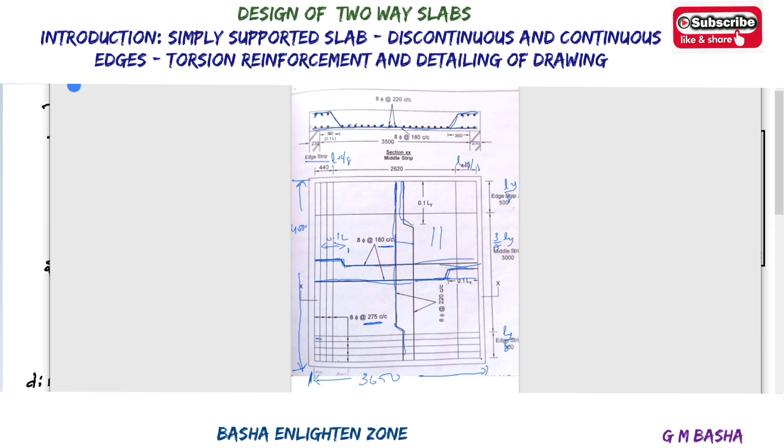So this is the slab in the XX direction we are showing in the diagram. This is how generally the slab will be. This is the procedure for giving detailing of the bars. The cranks will be around some 0.1L. This is the width of the column, see each and everything. Like that you have to divide edge strip and middle strip on both X and Y direction, and stretch that bar, cut the section in the XX direction, and whatever part is seen in front view you can provide the same in the section XX wise.

And again I will show you another procedure. Sometimes if you observe this in two-way slabs, they will provide the bars like this also. Generally one bar will be provided like this, and another will be cranked on both sides like this in one direction only.

Again another bar will be left like this only, another bar will be cranked. So in the y direction also they are providing it like this, one bar will be cranked, meaning alternate bars cranking on both sides.

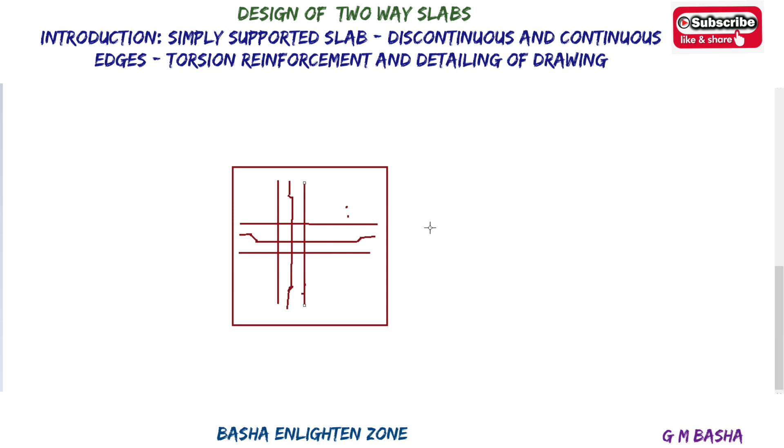See here, the bar will be cranked here. Again, one more bar, a straight bar. So one bar will be cranked, one bar will be straight. Like that also you have to provide. So previously what I showed in the diagram will be like this: one bar will be cranked on one side, another bar will be cranked on another side.

Okay, this is the difference of the bars, and at the same time we provided torsion reinforcement for another problem. So how will the torsion reinforcement differ? See here, you can provide torsion reinforcement like this at all the edges. I will talk about this edge. We can provide the torsion reinforcement both top and bottom. For example, I will show you that image also, and whenever torsion reinforcement is provided, how it will be.

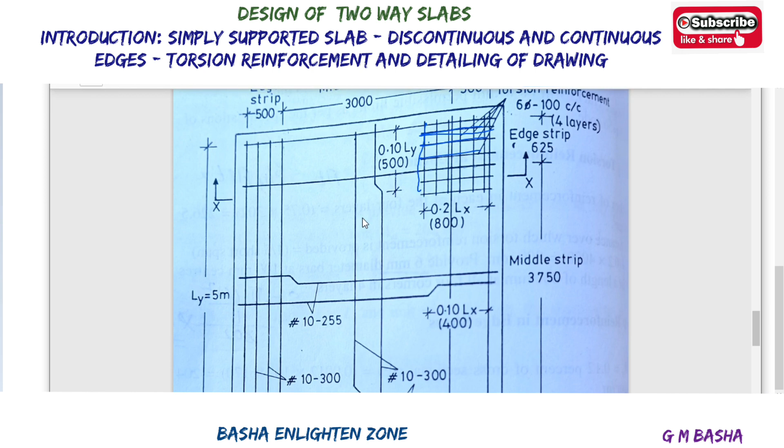See here in the diagram, I will show you one more diagram. See here, this is the torsion reinforcement provided in this slab. So see here, this is the torsion reinforcement at the supported edges. This is only two layers, one bar, another bar, that is two layers. And again, at the bottom of the slab also they are provided. If you see in section XX, you can observe clearly.

This is the torsion reinforcement, clearly visible in the top bar. One bar will be upper. Again, at the bottom also they will provide bar and hooks. So this horizontal line will be this horizontal line only. This round diameter bar will be in section XX. It will be observed like this. Here also it will be observed like this.

So you can observe clearly, after providing the torsion reinforcement, you will get the side in the XX view like this, in the section XX view like this. So like this we have to provide torsion reinforcement for all the corners, but here in the image they are showing only once, because this is a simply supported edge. And what about this length? Already we calculated that length will be around 725mm both in X and Y direction. This is how the procedure will differ.

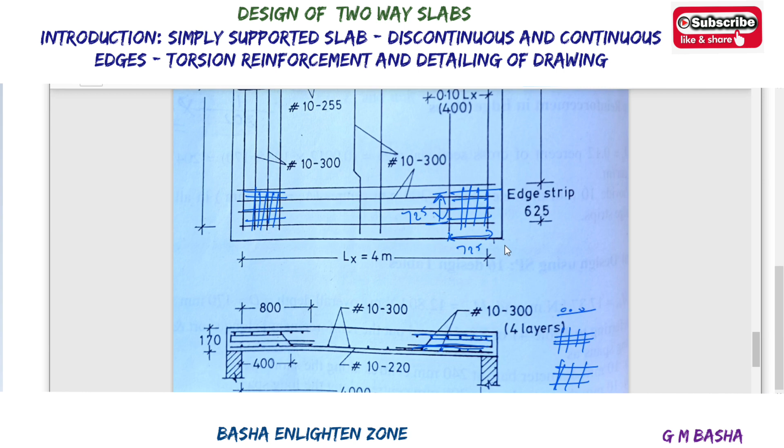If you provide torsion reinforcement it will be like this. If you provide a general detail without torsion reinforcement it will be like this general image. So if you provide torsion reinforcement, the images will be like this, and at the same time the cross sectional XX view will be like this. Here also they are clearly showing the torsion reinforcement both top and bottom.

So this is the difference in the procedure of how to provide the detailing of the reinforcement.